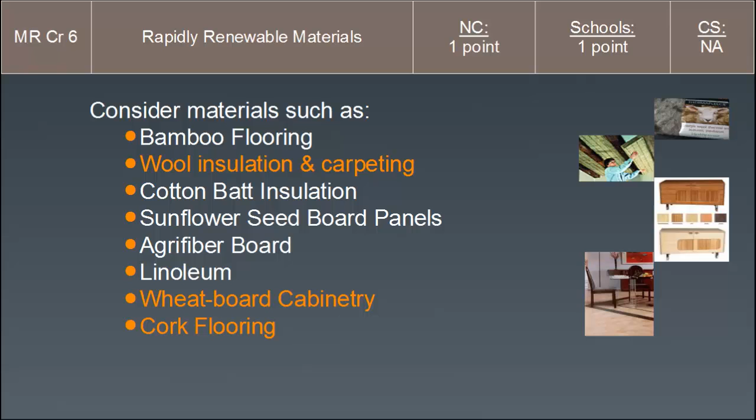It's important to check GreenSpec, buildinggreen.com, and other resources to shop for alternatives to traditional building components. Performance is always most important, but there are materials that are actually competing with your traditional building components and still have these sustainable attributes.

First, you need to determine the total material cost. You can either use the default 45% material value we discussed previously, or better, the actual material cost according to the CSI format schedule of values. You need to create a table with the product name, total product costs, the percentage of product by weight that meets the rapidly renewable criteria, the material manufacturer, and you need to keep all the manufacturer's data sheets documenting the rapidly renewable origins.

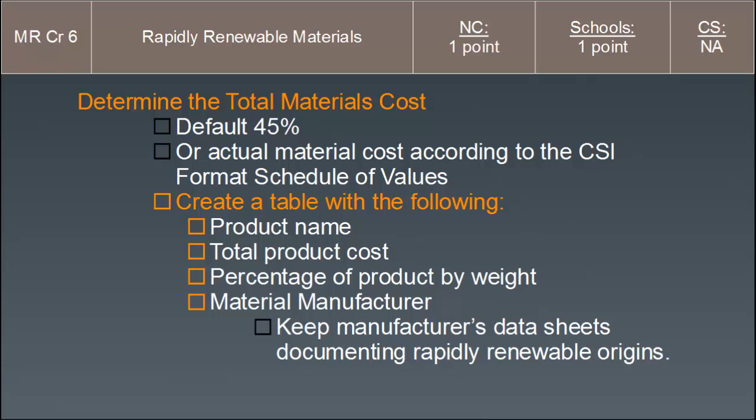For the calculation, it's the total cost of rapidly renewable materials divided by the total material cost times 100. So for assemblies, where only part of the product is rapidly renewable, you take the rapidly renewable weight divided by the total weight of the product, and that percentage you multiply towards the cost, and that's the total cost of rapidly renewable material. That's what you plug in and then divide by the total material cost. That's for assemblies where only part of the product is rapidly renewable. And that's similar to recycled content, regional material, and rapidly renewable materials. So make sure you understand that calculation method.

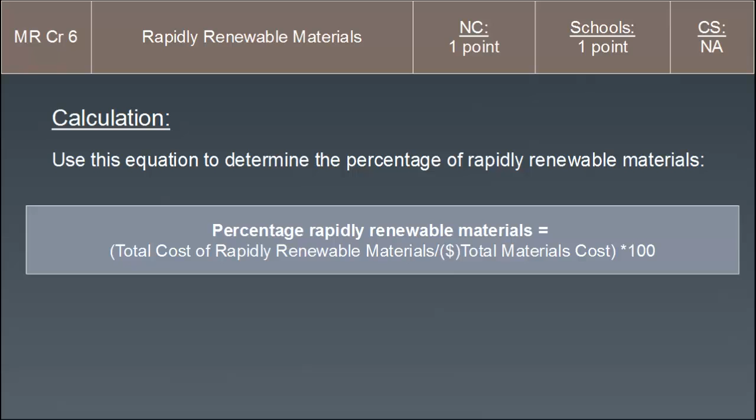Bamboo is not the only rapidly renewable product, but it is a great example. Here's some fun facts about bamboo. It's a grass and the fastest growing wood-like substance on the planet. Moso bamboo is the variety most commonly used in flooring and building products. It grows to a height of 50 to 60 feet in only 18 months. So as a toddler, it's 60 feet tall. It also reaches maturity and can be harvested after 4 to 6 years of growth rather than 30 to 60 years for trees of most types.

And the day after a stalk is harvested, there will be 4 to 7 plants in its place, therefore it's rapidly renewable. It can also offer incredible erosion control due to its rapid regeneration. Now you have to be careful about this because it can also take a rampage on native species if it's not maintained or used in a corrective way. So just keep in mind that there's always trade-offs to these strategies. Make sure to use bamboo in a responsible way, especially for something like erosion control. But as a building product, it has great tensile strength. As you can see here, it's used for fencing in a terrace-like structure.

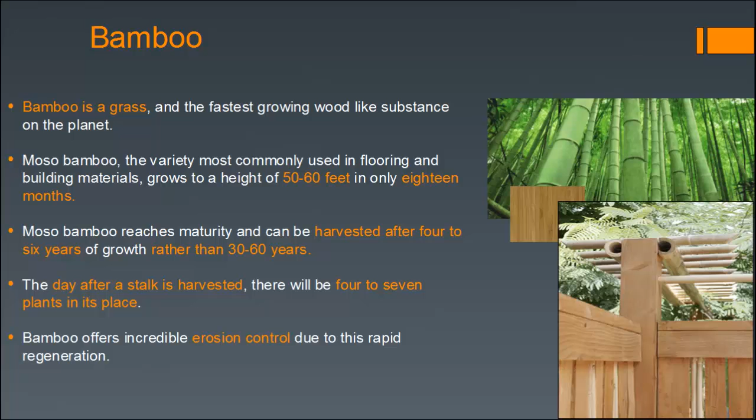The last credit in the material and resource category has to do with wood. Here's a fun fact: the first use of sustainability I have found. In 1713, Hans Carl von Carlowitz used the phrase, I don't speak German, but there it is, which describes the forestry practice that limits wood cutting to the forest's average annual growth. And basically that's sustainability in a nutshell, only using as much as can be replenished by nature. It can rejuvenate itself if we give it a chance, so it's just about being smart with our resources. And many historians consider this to be the first use of sustainability in its modern meaning. And it's a very, very simple concept.

My grandma was my mentor in sustainability, and that's really because she survived a depression and found out she has to be self-sustaining, reuse things as much as possible. And I think we have to have that same type of mentality, even in high times, because we have to prepare for depleting resources and in times when there isn't so much flourishing around us.

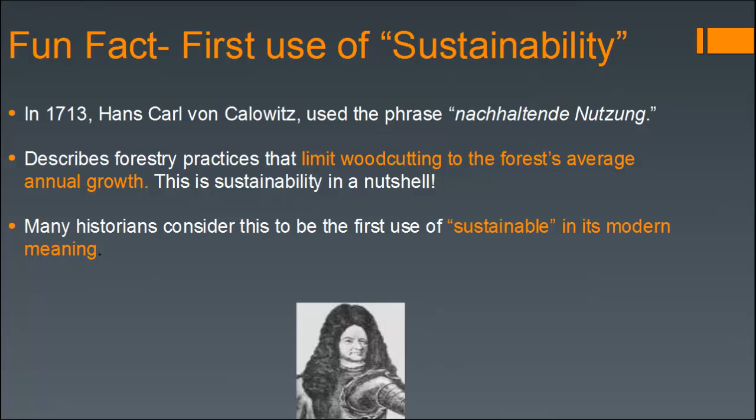MR Credit 7, Certified Wood. The requirement is to use a minimum of 50% of wood-based materials or products that are FSC certified. The standard you need to know is the Forest Stewardship Council. This is important to note.

Components could include framing, flooring, and subflooring, wood doors and finishes. And there is an innovation design credit available if 95% of the wood budget is FSC certified.

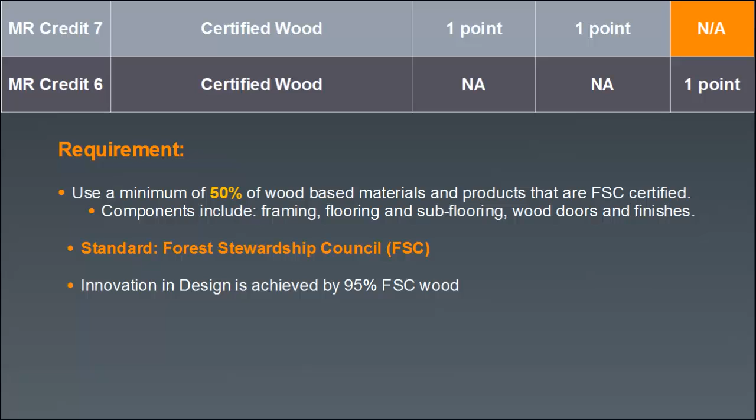In pre-bid, it's important to provide project bidders with a list of certified vendors and encourage them to make contact early in the project to establish product availability and pricing. To ensure availability, consider owner purchase or even pre-purchase, store and supply particular items to the contractor. FOIC, furnished by the owner, installed by the contractor.

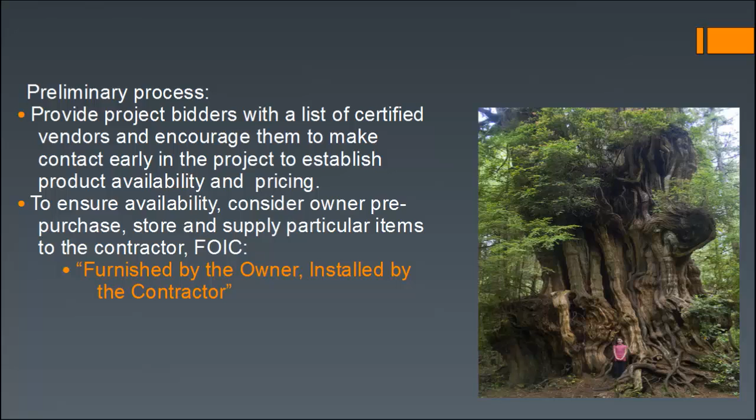And this can ensure that those items will be accessible to you when you need them, because it is a stringent certification process. So it's important to make sure that you have items that are accessible to your site that have gone through the proper verification process. And if they have, they will have the proper chain of custody documentation right on the product.

The chain of custody requirements include: collect a vendor invoice for all permanently installed wood products, identify each product on a line item basis, identify each FSC certified product on a line item basis, and show the dollar value of each line item, include the vendor's chain of custody certificate number. This is important to verify for quality assurance on site, that when wood comes on site, it has that chain of custody number right on it.

And an FSC accredited certifier must certify each vendor as well. So even where you're purchasing that wood, if the wood comes off the truck and goes into a lot that wasn't certified to handle that FSC product, it loses its chain of custody. So it's important to be diligent in this process.

Documentation is key. You need to track all purchases of FSC certified wood products. Keep COC documentation for each purchase. Keep invoices for all certified wood purchases. And keep a list stating the percentage of certified wood in each purchase. So it's a full verification process from the forest to the vendors to the site.

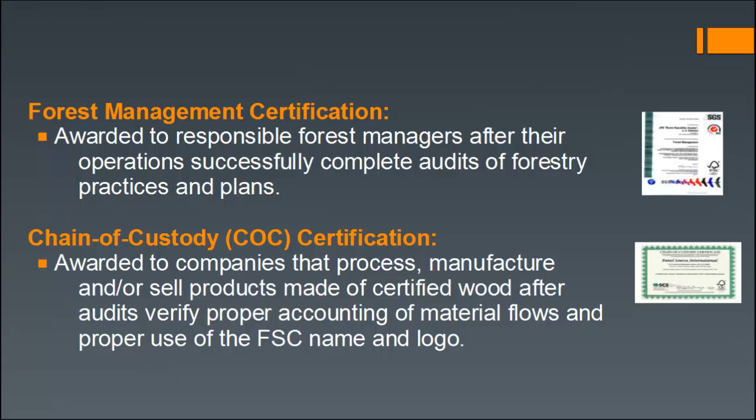So equation 1, take the certified wood, which equals Forest Stewardship Council certified wood value over the total new wood material value. So for assemblies, only the percentage of FSC certified wood can be applied. There's FSC pure and FSC mix, which equal 100% FSC.

You need to determine the percentage of new wood and FSC wood based on weight, volume, or cost. Cost would be most beneficial in the case of veneers, where you have lighter weight but more cost. And then you enter these values in addition to the total value of the product into the submittal templates. Once again, it's important to track this as materials come on site.

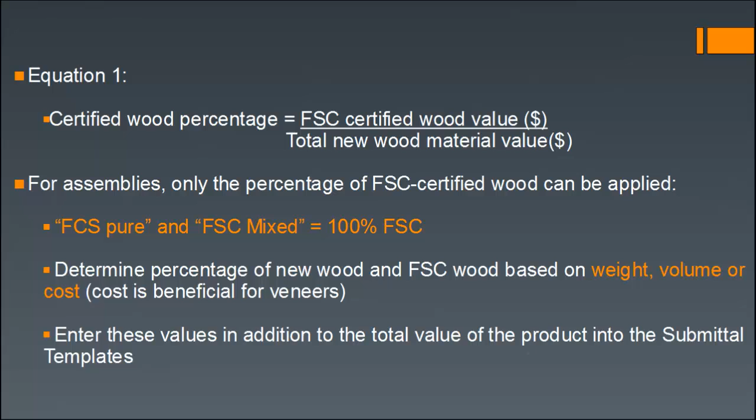The environmental benefits of Forest Stewardship Council include long-term health and productivity of forests for timber production, wildlife habitat and productivity of forests, clean air and water supplies that we depend on, and climate stabilization. So once again, trying to reduce climate change. Our built environment is a big contributor to how we use our resources that affect our environment.

Social benefits, so once again looking at that triple bottom line of economics, environment, and social benefits. There's long-lasting community employment derived from stable forest operations. So instead of just clear-cutting and moving on, this is actually something that can help a local economy.

General overview. The value of recycled wood fiber content of a product that qualifies for MR Credit 4, recycled content materials, cannot be applied to MR Credit 7, certified wood. Materials qualifying for MR Credit 3, material reuse, cannot be applied to MR Credits 1, 2, 4, 6, or 7, but they can be applied to MR Credit 5. This is important to understand for the test when they apply these questions to different case studies.

Exemplary performance for the material and resource section includes MR Credit 1, building reuse. You want to maintain existing walls, floors, and roof. It's only for core and shell. So if you maintain 95% of the existing components, you can get an exemplary performance point. For MR Credit 2, construction waste management, if 95% of the materials and waste is diverted from the landfill, you can earn this exemplary performance point.

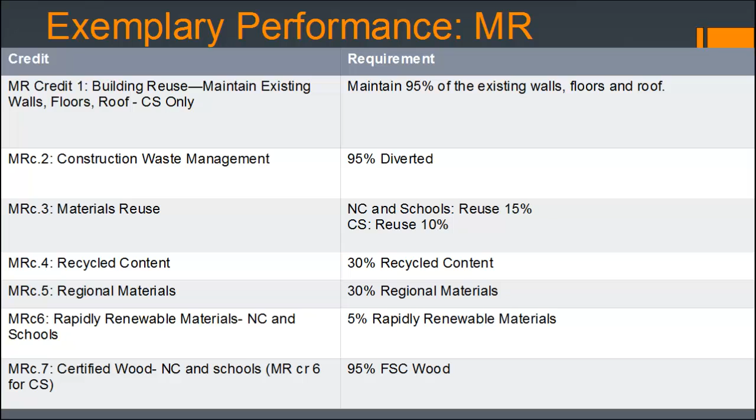It's a case study of Miro Tea in Seattle. If you're in the Northwest, the Ecohaus is an eco-friendly material selection. There's places all over the country, vendors helping you select green products and get started. Once again, beware of greenwashing. Make sure to ask good questions. But even a Home Depot can help you start to make these decisions. It's important to be a smart purchaser.

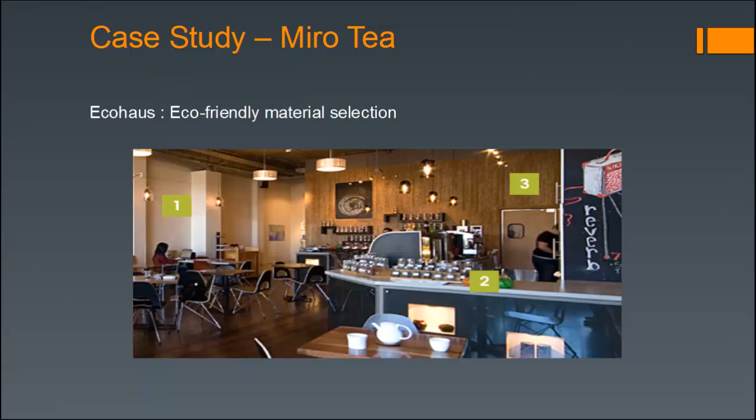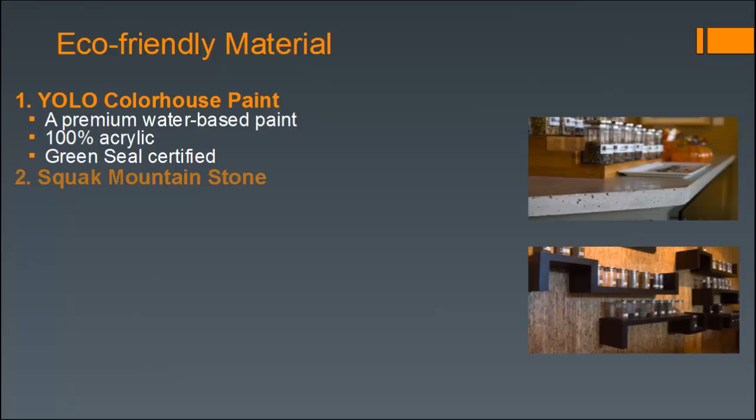For this example, eco-friendly materials included YOLO Colorhouse Paint, which is a local Portland paint company that really started their company with the premise of seeing how sustainable paints and coatings could be. It's a premium water-based paint, 100% acrylic, and Green Seal certified, which pertains to low-emitting materials in the indoor environmental quality section coming up next.

Squak Mountain Stone was used on the countertop. It's a soapstone-like composite made from recycled waste paper, glass dust, and low-carbon cement. Kirei board is the wall board you see. Its Japanese name means clean and beautiful. It's made from the stalks of the sorghum plant, which is harvested within a 10-year cycle, meaning it's rapidly renewable, according to the LEED criteria. The stalks are a reclaimed agricultural fiber because they are usually burned or thrown into landfills after harvest. So in addition to being rapidly renewable, it's using something that would have been otherwise burned.

Now, if you are in the U.S. and speccing this Kirei board, you have to take into consideration the carbon footprint of shipping it from Japan. But everything in sustainability is a cost-benefit analysis. Nothing is perfect. There's a menu of choices to build a perfect green building. So it's important to understand the process, ask the right questions, continuously do this cost-benefit analysis, and then track your totals throughout the process and keep good communication with the team. And we'll look at how to utilize tools in real-world examples in some of our exercises.

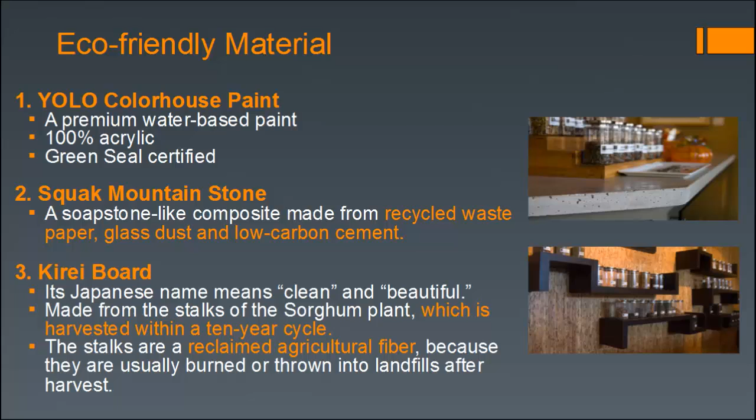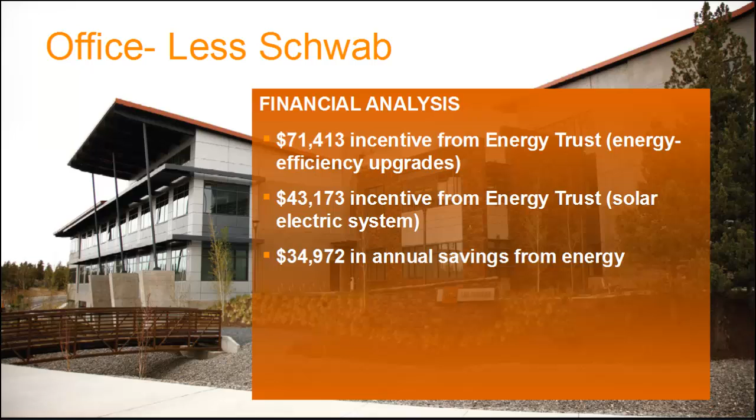One case study is Les Schwab in Oregon. It took advantage of a local incentive program called Energy Trust. They received $71,000 in incentives for energy efficiency upgrades, about $43,000 for their solar electric system, and they saw approximately $34,000 in annual savings from energy. So total life cycle cost savings help pay for that upgrade.

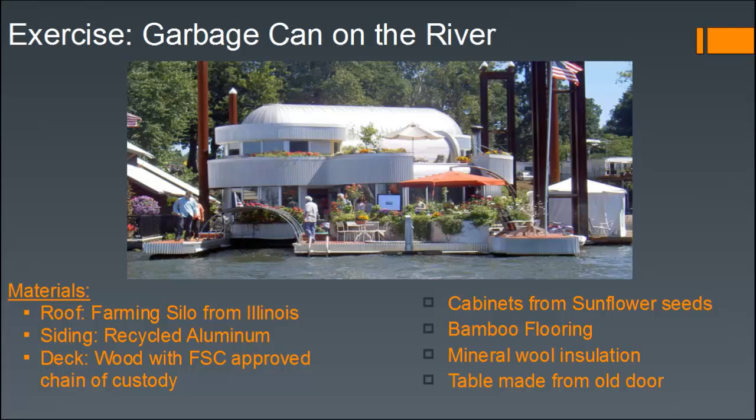So the siding, recycled aluminum. Maybe MR Credit 4 came to mind, I hope. Deck, wood with FSC approved chain of custody. MR Credit 7. Cabinets from sunflower seeds. This can be a trickier one. Remember that long list of rapidly renewable. Bamboo flooring as well. Mineral wool insulation, both rapidly renewable. And a table made from an old door, reused material. Once again, it's just looking at our materials in a new way with a new lens, into the material and resource section.